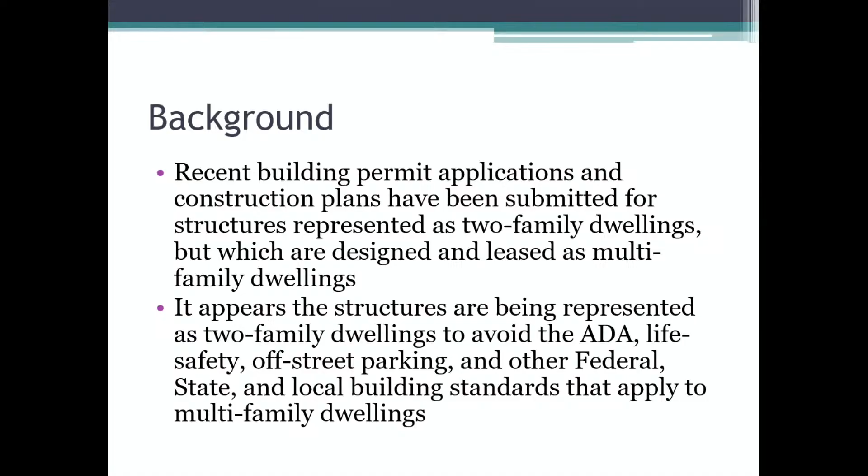Well, this is just as it sounds. So looking at maybe some potential code amendments for the commission's consideration here for 2-family dwellings throughout the city. Recently we've had some issues with some building permit applications and construction plans submitted to our office that have represented 2-family dwellings, as indicated in the application and plans, but they're designed and leased as multifamily dwellings. It appears these structures are being represented as 2-family dwellings to avoid things such as ADA, accessibility, life safety, off-street parking requirements for multifamily, and other federal, state, local building standards that apply to multifamily dwellings.

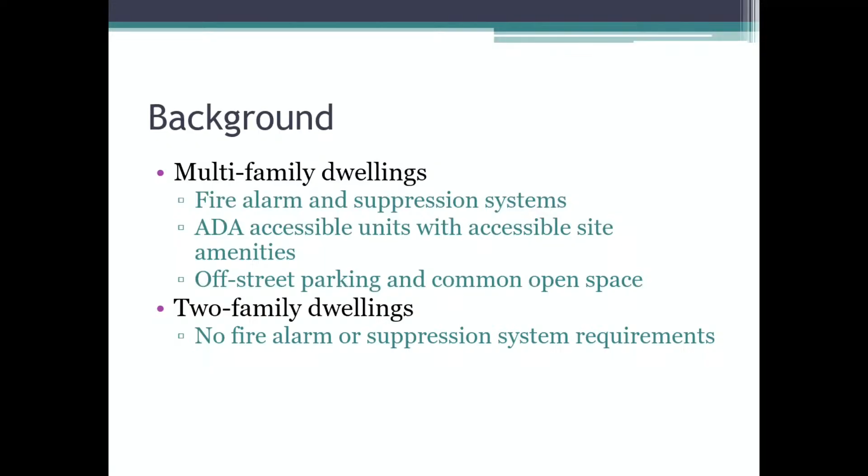Within multifamily dwellings, there's requirements for fire alarm suppression systems, accessible units with accessible site amenities, accessible parking spaces, accessible routes to the public sidewalk and building entrances on the ground floor, and then off-street parking and common open space requirements as well. 2-family dwellings don't require the fire alarm or suppression systems or the ADA requirements, and they have a much lower parking requirement. No ADA parking is required either.

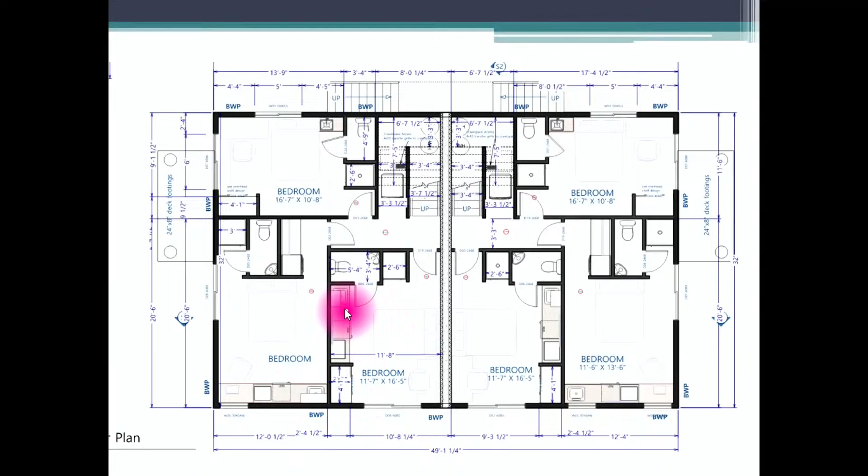So you can see the bathroom here, this is one bedroom, the sink kind of being moved out into the bedroom area. And then these other bedrooms are more apparent. You've got a sink in this area as well, like a mini refrigerator, kind of a desk countertop area. I think this is supposed to indicate a microwave, but no 220 connection, no permanent cooking facilities, more just temporary. Same thing. So over here, you've got the refrigerator, microwave, as well as a sink in the bathroom.

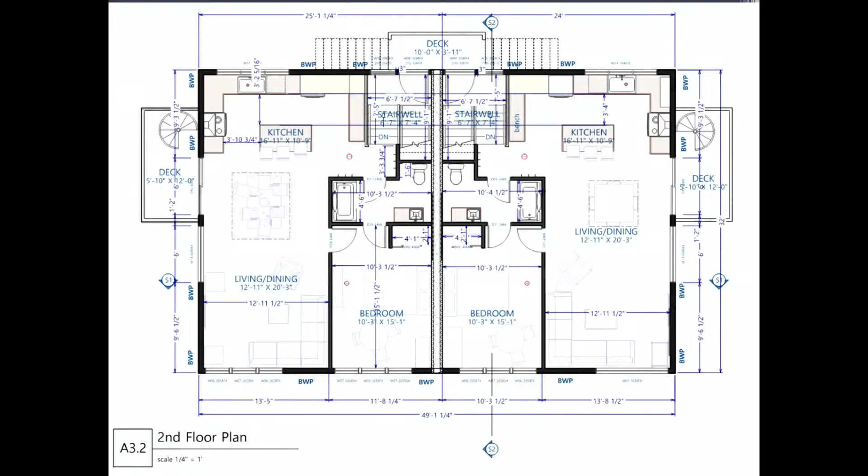Then you have a common washer and dryer situation here. I think there's one over here as well. So then you go up to the second floor. This is kind of a common duplex. You've got the kitchen, living area, and then this bedroom doesn't have those amenities with the sink and the cabinetry or the refrigerator in that.

So these kind of evolved. These are another set of plans that we received within the last couple of years. I think this is 4 stories. This is kind of the basement, but this is the first floor. This is the main entrance here. You come into a common stairwell area. There's the kitchen, dining and living area located on this floor.

You can go downstairs, essentially looks like the same footprint. From the stairwell, you go into the unit here, and they've got a sink, some cabinetry, and a refrigerator. So that goes up to the second, the third floor. Pretty much just mirrors those other floors. From the common stairwell, you go into the bedroom, is what they're calling it, and they have the sink and the refrigerator and the cabinetry here, as well as these are, I think, supposed to indicate stackable washer and dryers.

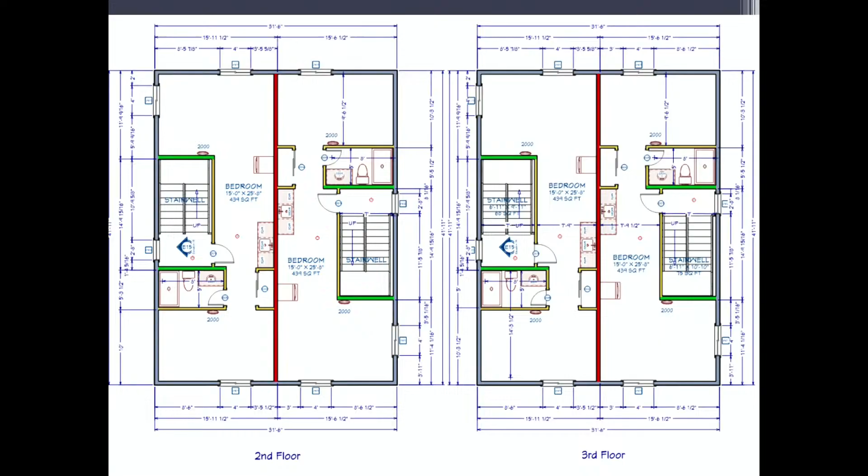And then there's a 4th floor, so about 5 floors in height, given the foundation as well. And the same scenario here. So we've got a sink, cabinetry, stackable washer and dryer, and a fridge. And then the stairwell ends up leading up to a rooftop patio.

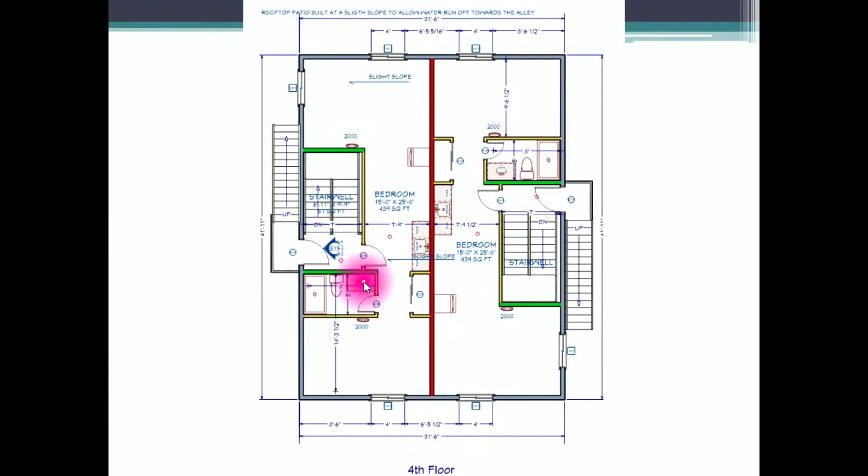So you look at this situation, and yeah, I mean, it technically meets the definition of a 2-family dwelling. It's all connected, but you can easily rent out these spaces separately. Just use the common stairwell, have a door accessing these units, and we've had some code enforcement activity where it's indicated that the kitchen unit has turned into more of an Airbnb. So this has been pretty much a door has been blocking this off, and the structure has been used essentially as a multifamily dwelling, which is permitted as a duplex structure.

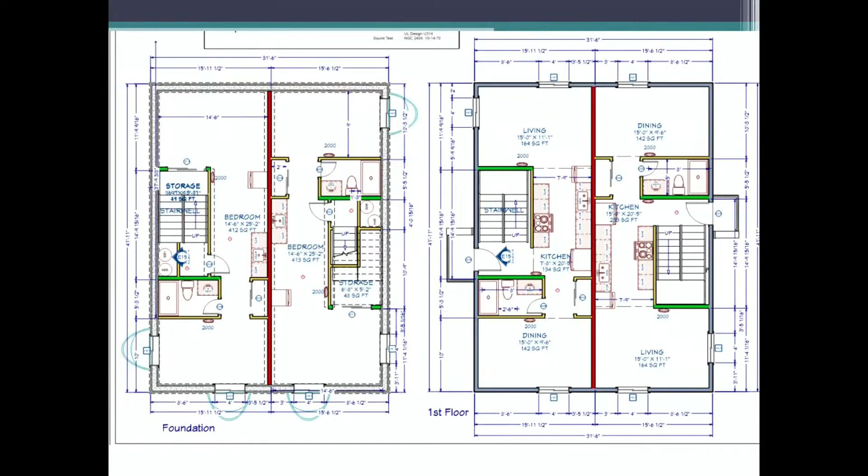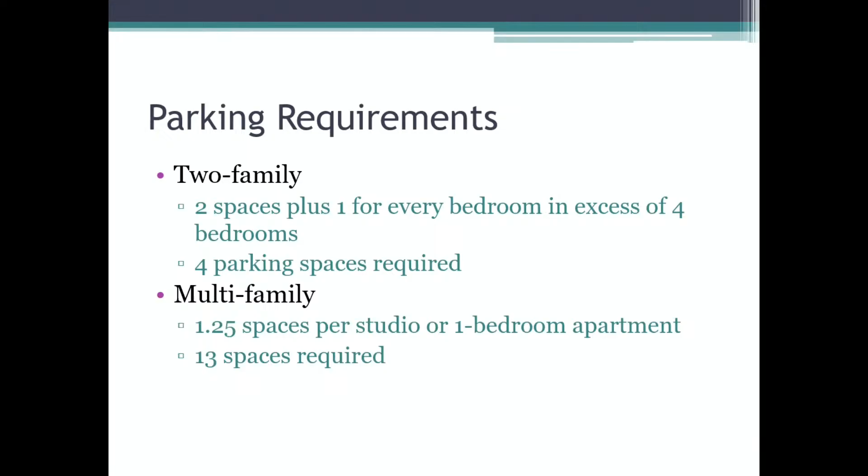So looking at the parking requirements, 2-family is 2 spaces plus 1 for every bedroom in excess of 4 bedrooms. 4 parking spaces are required for this structure because you have a kitchen in one of the levels, and then there's 4 bedrooms on the next 4 levels. Multifamily, you look at 1.25 spaces per studio or 1-bedroom apartment, essentially the equivalent of what these bedrooms are. 13 spaces are required. So quite a bit more. And no, some of those common facilities that you'd typically see with a multifamily apartment complex.

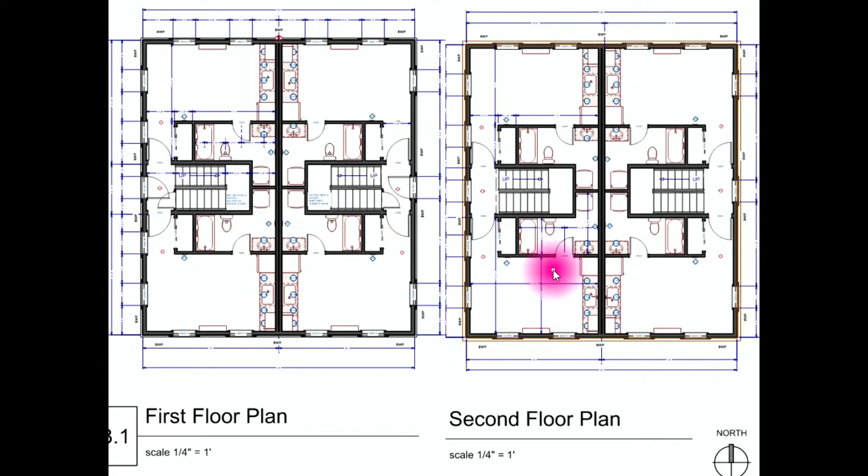So this is another more recent floor plan that was submitted to our office. You can see, follow the first floor, coming in the front of the structure, front entrance. These are doors which access both sides of these bedrooms. Each bedroom contains a sink as well as the microwave and a refrigerator and a bathroom. And then these are stackable washer and dryers in each one of the bathrooms. You go out to the common stairwell there, go up the second floor, essentially the same layout. Each one of these bedrooms has complete housekeeping facilities, which would constitute a separate dwelling. And then you go up to the third floor.

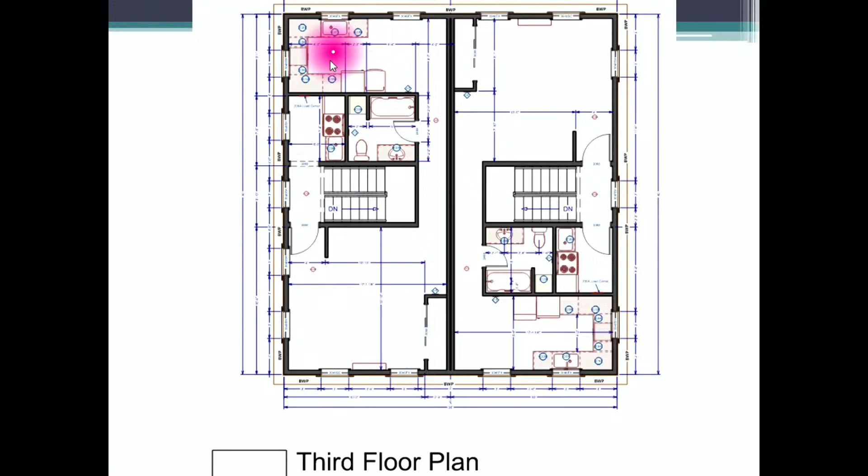They've even gone to the extent of, within the stairwell, adding a stove and other cooking appliances here to say that that's access for all of the bedrooms, in order to be able to use essentially the kitchen area off the side of the stairwell. So this is another bedroom that has complete housekeeping facilities with a refrigerator and the stackable washer and dryer in the bathroom.

So we're looking at potentially doing some amendments to the zoning code to address this, to make it explicitly clear what is and what's not allowed. So first would be amending the dwelling unit definition. Currently, a building or portion thereof providing complete housekeeping facilities for one family. And we would propose adding: housekeeping facilities that provide permanent provisions for living, sleeping, eating, cooking, and sanitation shall be limited to one kitchen and one washer and dryer set per dwelling unit, unless otherwise permitted by this code.

So within single-family dwellings, which we really haven't had this issue, you get a large single-family dwelling.

Some people want a second kitchen, like a canning kitchen or brewing area. We've typically permitted a second kitchen with a deed restriction, essentially stating that we're knowingly permitting it, but you have to abide by the definition of family. There can't be any separate communication; it has to connect throughout the entire structure and can't be used as a two-family dwelling. We record that against the property to put future owners on notice, and we'd still include that language in any code amendment as a policy option for single family dwellings.

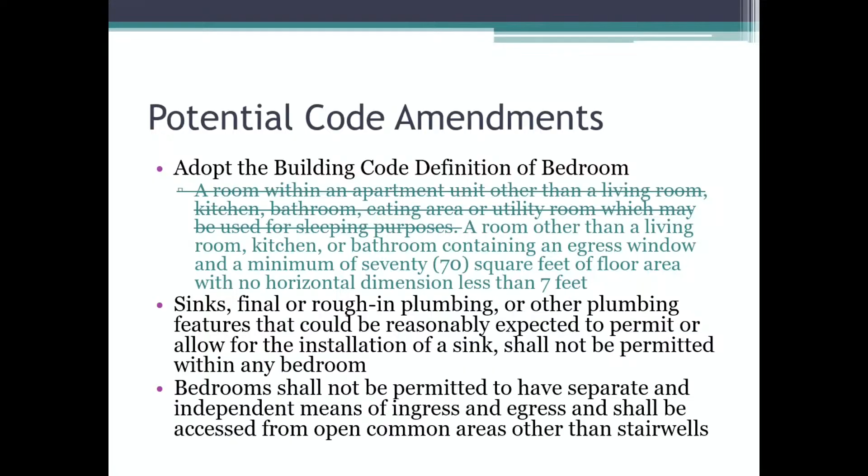So we have a number - in R3, R4 zones, and in RO, we allow multiple structures per lot. In those residential zones, if you have enough lot area, you can have a single family and a duplex, or a single family and a single family. We allow these multiple structures, and you can see this has primarily happened along the core, between the university and downtown, the Alman Asbury area, north of 6.

You can see there are numerous structures developed behind the old houses - there's usually an older house and the new structure's developed behind that. This is 3rd Street, same scenario - older houses with new structures built behind them. They're not required to meet ADA requirements or anything like that.

So it ends up creating a whole host of parking issues as well as open space problems. If you look at how these are crammed in here, there's only 6 feet of separation between each structure, which meets building code requirements and setbacks for the entire lot, but you end up with essentially just parking everywhere and no opportunity for any open space for the residents living among these 4 structures on that lot.

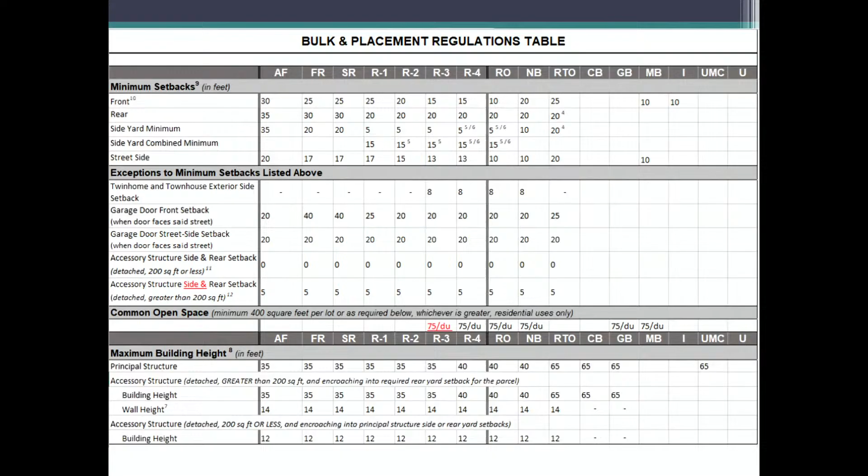But if you look at functional open space, right now, like I mentioned, we'd potentially add that requirement to the R3 zone and then amend the definition. So right now our functional open space is land within a development which is permanently reserved as open space, free from permanent structures, useful for recreation or social use by the residents of the development or others.

Such space should not include streets, roadways, or parking areas. The streets, roadways portion always befuddled me a little bit—I don't know that you'd really have a street or roadway on the property. So essentially it's just not including the parking areas. So we look at maybe eliminating the last portion of that, and saying such space shall be located on the ground level, may be provided via private yard, deck, or patio area. Functional open space should not include any parking areas, and the smallest dimension of such open space should not be less than 15 feet.

This is kind of common for other open space requirements, like in our townhouse standards—there have been apartment complexes that said, well, there's a 5-foot setback between the building and the property line, and they add up all those linear dimensions to get the open space requirement. I think the intention has always been that it'd be a larger, more symmetrical area to provide the open space, but I'm not married to 15 feet. I just thought that would get away from the 6-foot separation, and would require those buildings to be separated from each other more in order to satisfy an open space requirement. So that was kind of the intention.

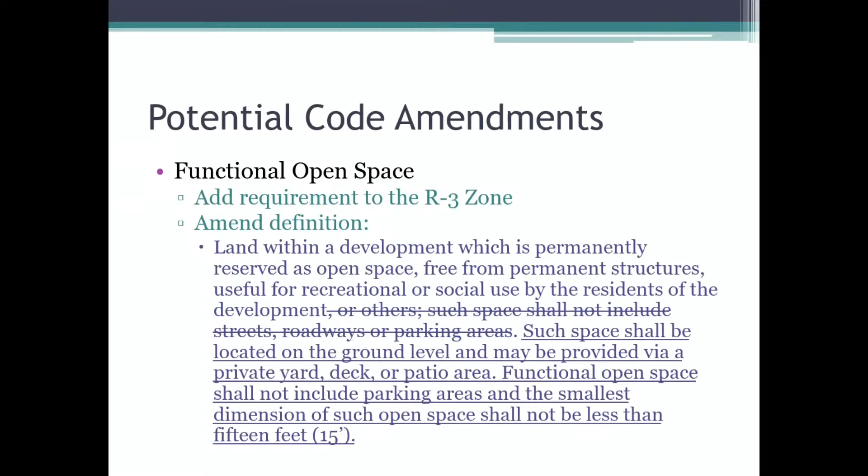So the thought here is just to get the commission's thoughts on the proposed amendments, whether it's worthy to pursue any further, and then if so, direct staff to prepare an ordinance for the commission's consideration at an upcoming meeting.

So are you considering this R4 or R3? Your proposal is under two different—it's multifamily but two different units. Are you saying to put it in R4? No. These type of developments would be allowed in R3, R4, or RO, and then some other commercial zones. So it would apply universally, it's not site specific. No, okay.

I'll be honest, I really dislike this stuff. The whole reason is I do not like taking people's creativity away when you're looking at a site and really trying to do something positive. I understand why you want to do something because this is a life safety issue. I really feel like this should be in the building code. I've had this discussion a lot, and I know I'm losing that discussion, but I want to say I'm happy to be part of it. I really like infill.